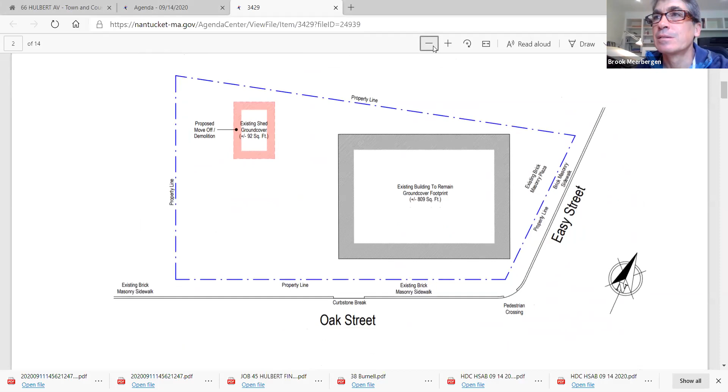So first item is 26 Easy Street, Kevin Dale, move off demo shed. You all know where this property is. There's two applications, one for this structure and one for this one on the corner of Oak and Easy Street. NHL data indicates that this is from the 60s, 1965. So this is the first demo move off, that shed, and then that's the second.

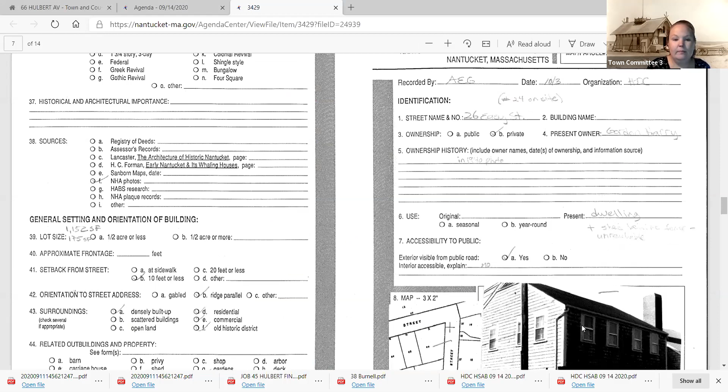I can get back down here. Don't believe... oh yeah, there is a HDC survey. This used to be Harry Gordon's property, just to give you a little bit of history to it. There are photographs that were included, they have not deciphered exactly when you look at these. Let me see if I can get to them. Might not be in this application. No, it's in the other one.

But there's historic photographs of the other structure. I think the main structure is older, but anyway, that's a different story. What's before you right now is just the shed. Which, Mickey, do you have any thoughts indicated on this shed? Who are you asking, Mickey Rowland? Oh, Mickey. Unmute, you got to unmute.

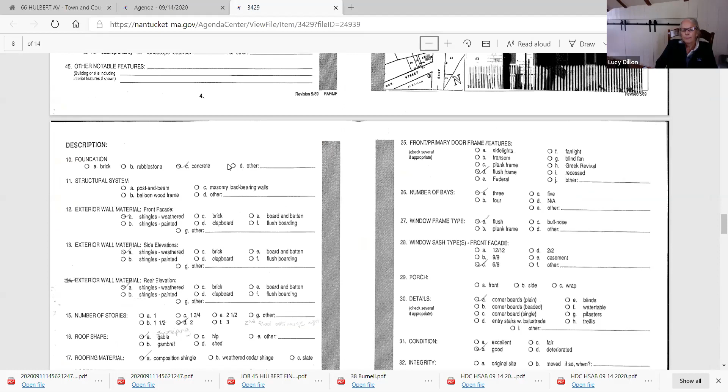Okay, sorry, looks like it's a concrete block shed. I think I'm fine with demo on that shed. Lucy? I'm fine. Okay. Angus? I concur. All right, no concerns from the chair.

Okay, get to the other one. This next one is demo move off mixed use structure. So this is the main building next door. Sorry, as it loads.

And what do we know about this? Well, I think it's older, just been changed over the years, the facade. But if you look at some of the historic photographs that they included in the application, and I've actually been looking at a lot of historic pictures from Easy Street Basin area recently.

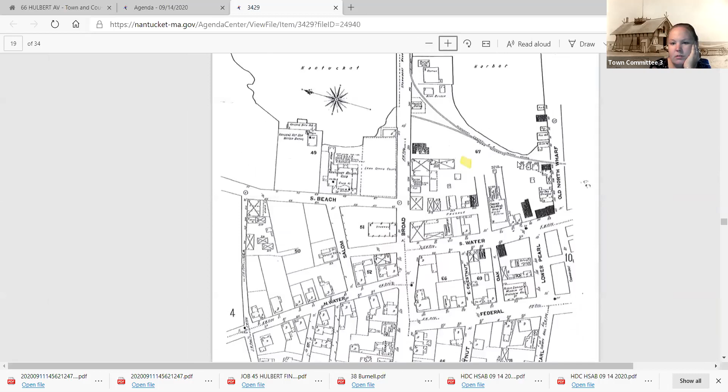Here. We all know. We've lost you again, Holly. That better? I do know they had to go to the ZBA for a lot of relief on this building when they converted the use.

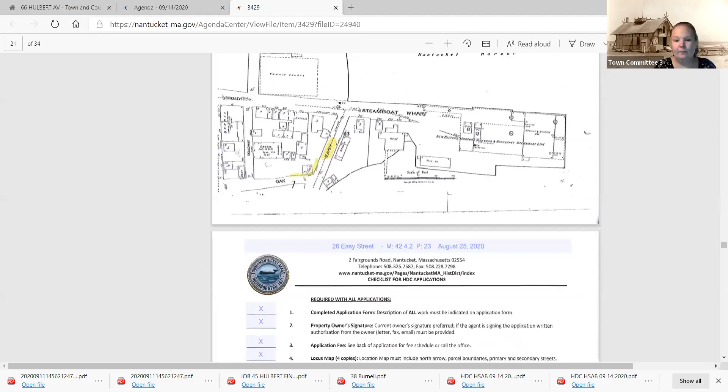So that is it. Looks like something showed up there in 1923. Yes, that's what I was about to say. On the '23 map, it looks like it first appears. That could also be the 1949 one because some of those are stamped 1923, true, but it's 1949.

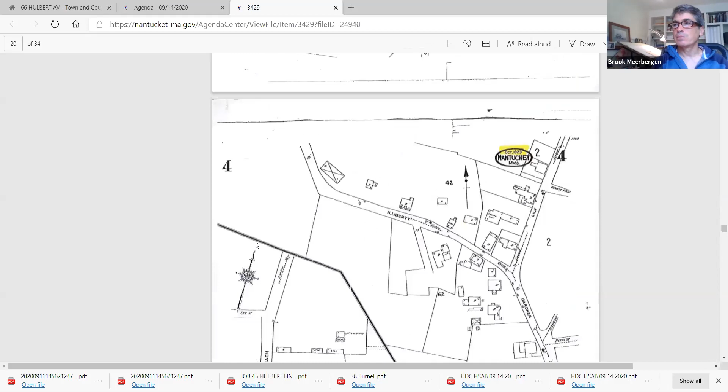Anybody notice any cinder blocks or anything on this thing? I'd like to see a better assessment of the building. Me too. I don't think we can make much of a discussion unless we know the date of this building.

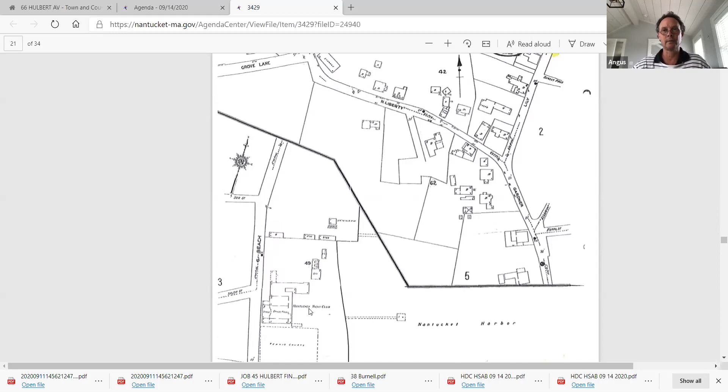Maybe just some sort of forensic work inside to look at the framing or the structure. With those garage doors, I would wonder how much interior was there if it was just like an open barn. From the front, it looks like it could be a house, but then with the garage doors, you wonder if the whole thing was just a shell inside.

As the building is now, there's nothing about it that says historic or valuable or any of it. And I really wonder what's really there. It would be great to have an as-built of it and maybe photos inside, to really judge what we're looking at, because it's hard to tell from the outside.

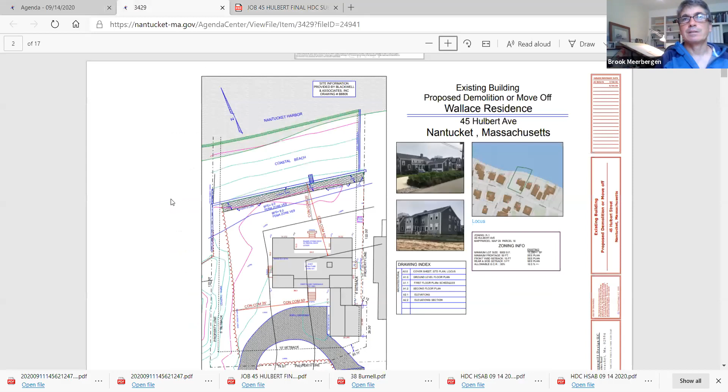We've done quite a bit, with Linda's help, we've done a lot of research on this project on behalf of the history and whatnot. What I'd like to do is break it down into three parts. I'd like to read our submitted general thoughts to give you an overall frame for what we're presenting, then look at the specific building, and then look at the precedents and context and the greater history for Hulbert.

So if it pleases you all, I'd like to just go ahead and read the general statement, unless you've all read it and you're all 100% zoomed in on it. I'll go ahead and read it. I've read it, but I've... Lucy, read it too. I've read it. Mickey, you've read it? Okay, everyone, so would it serve you better for me not to read it?

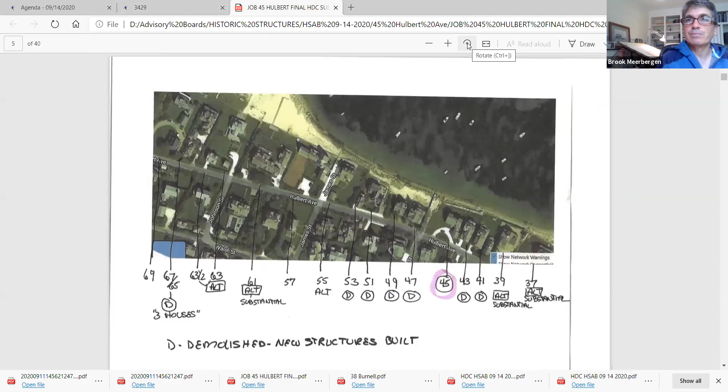I think we're okay to talk about it. If you want to just outline some of the basics, your basic arguments, certainly, why don't you do that? I'm just going to go ahead and read the whole thing.

For the applicant, on behalf of the applicant, we wish to demolish or remove off-site the existing dwelling with the attached garage. Once the structure is removed, a new dwelling approved by the HDC would be constructed no closer to the water than the existing structure. The Conservation Commission has approved the project as presented after consideration of the new design and proposed siting and the footprint of the structure. Maintaining the view corridor to the west was critical, which also resulted in compressing the house east to west.

It should be noted that we're holding pretty precisely to the existing footprint for Concom reasoning. A previous dwelling was located on the site. It was moved in 1938 to 25 Willard Street. It was of a dissimilar architectural design. The current structure was built in 1938 or 1939.

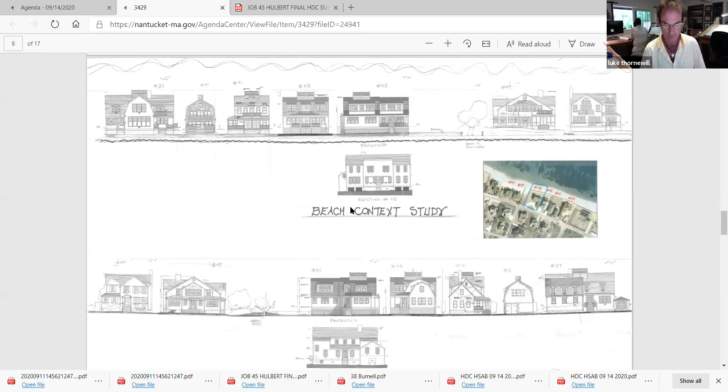Unlike the structures that are to the east down Hulbert, this lot is situated within a section of the street that has had substantial changes. 45 Hulbert Avenue is in the middle of 8 lots that have all had original structures demolished or substantially altered or were vacant, and new dwellings and ancillary structures built since 1985. Our review of the material submitted clearly indicates that the structure on 45 Hulbert is an anomaly.

Hulbert Avenue has an eclectic mix of gambrel and shingle styles with some more modern styles. There are a few box types like the existing structure, and the existing structure does not meet the guideline of building with Nantucket in mind, so we believe. There is nothing unique about the design compared to the others on the waterfront. It stands out as looming and with no variety in the facade.

Should the dwelling and the attached garage be brought before the HDC today, it likely would not be approved in our opinion. It does not have any discernible architectural style and thus is not architecturally significant, nor does it contribute to the neighborhood. Admittedly, it is over 50 years old, but that should not be the determining factor in requiring a structure to remain on site.

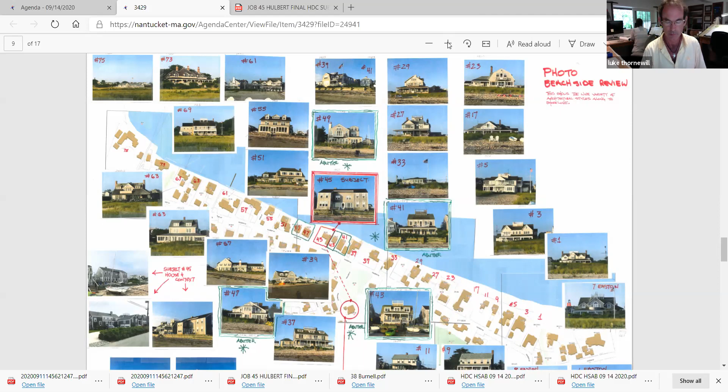There is little ability to work with the structure to improve it. Gambrel structures are more prevalent in the Brant Point area than elsewhere on the island. The new design would be in harmony with the neighborhood's context and typical of the architecture in Brant Point. It will be lower in height than several of the structures on the waterfront. The proposed design would have a less negative visual impact than the current structure, with the lower eaves that are currently in contrast to the vertical wall planes of the existing structure.

Proposed decks and fenestration on the water side in particular would be consistent with the other structures fronting on the harbor, as shown in the photographs. The configuration north to south is also consistent with a substantial number of structures on the waterfront. Data on the lots along Hulbert Avenue, photographs of those structures, aerials of the existing shoreline, and reports on several of the lots that have had demolition occur are included in the packet for your review.

We're looking forward to working with HDC on arriving at the best design for a new dwelling for 45 Hulbert Avenue, that would be an asset for the neighborhood.

I would just note that the island survey that accompanies this identified it as a contributing structure and called it out as shingle style, which I believe was in error, because based on my understanding of shingle style, and studying shingle style in college, this has no resemblance to shingle style architecture or any of the redeeming attributes to shingle style architecture.

Shingle style architecture, primarily in the late 1800s, had low roofs. They had tower elements, gang windows, bay windows. They often had a horizontality to them, second floor open decks. I think this has not been accurately presented on that survey as shingle style. I just don't understand how it could possibly be contributing as a shingle style building. So I'll just ask you to keep that in consideration.

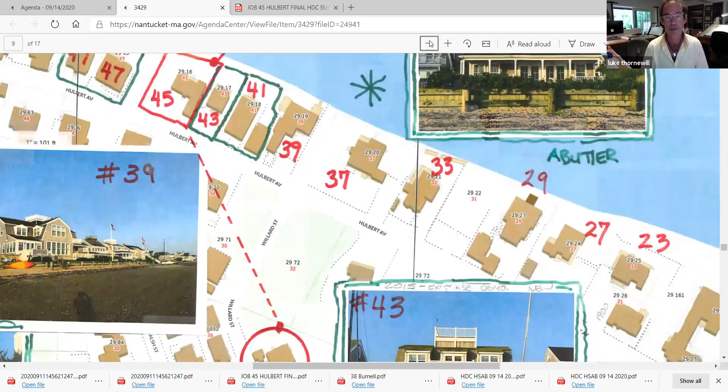And with that, I would hand it over for our context of what's happened on Hulbert, and maybe some more comments from Linda, who's done a really great job researching the history of the street and this property in general.

Hey guys, if you got it, you got it. So you were able to sort of get a grip on what we put in. After I did that map, there was one or two more that had been demolished and replaced, but you can see that we're in a section of Hulbert Avenue, unlike the section to the east of 37, down to 1 on Hulbert Avenue.

Down in that direction, you're familiar with the Craig property and a few of the other ones. A lot of those houses are still there, some with minimal alterations, but even the Craig house was one structure and it was separated into two structures on two separate lots. So even that has been changed. And some of the ones that are still there have been altered substantially.

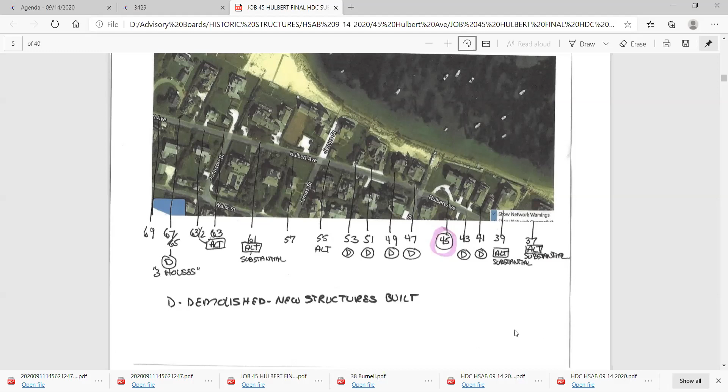If you looked at the pictures of Johnson & Johnson's house down at 73, I believe, that was a much smaller house, a beautiful house. And then they engulfed it with all kinds of decks and additions and everything else, and they moved that 50 feet farther forward.

Even Hammy Hurd's house to the right of our house there, with the new shingles on the roof, that was significantly damaged in the 1991 flood, and that was altered quite a great deal. The large one to the right has been minimally altered, of Hammy Hurd's house down to the right of the picture. So there's been a lot of change in this neighborhood, including across the street where there was nothing, and they all started to get built and houses were moved around over there. The gambrel style, as Luke said, is quite common down here.

And it's very eclectic. The one at 47 to the left in that picture is a very interesting looking house from the water and the road. It doesn't look like anybody else. You'll see dormers and additions, and not all of them have attached garages.

In fact, most of the ancillary structures are separated and actually front on Hulbert Avenue. But we're in a pod of about 7 to 8 structures with a little gap to the left, and then 3 more were demolished, and that were all gone. People have sort of assumed that everything down there dates from the 1890s or 1920s, and they don't.

Our original structure moved over to 25 Willard, and there are pictures in your packet of that, which is a totally dissimilar type of structure. But you can see from this picture how boxy it is, with no discerning architectural style. It looks like 2 really tiny houses that were stuck together with an intermediate structure of some sort. We'd like to just make something that's maybe even as eclectic as the rest of them down there, or something that fits into the neighborhood more.

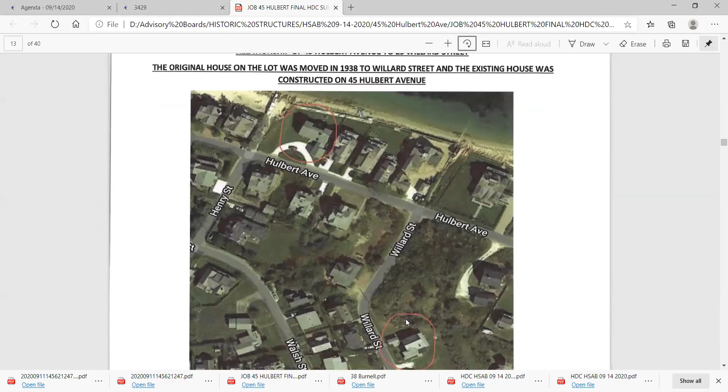So it's a changing neighborhood. It still maintains its sort of eclectic oceanfront estate kind of attitude, but this house really doesn't do it. See the other house down there? That's where that house went.

What's interesting about trying to date the houses down there — unless you look, because camera maps don't always do justice down there — is that when they can't figure out the date of a house, the GIS in the town records automatically puts 1900 on it, even though some of these houses, like Johnson & Johnson's house, clearly predate 1900, because there are pictures of it from 1880. When they don't know how old these houses are, they just throw 1900 on it and move on.

So it takes a lot of research — all these surveys, the aerials, the deeds, the old land court plans — to come up with a history of every single house all the way down Hulbert. I've had to do the same thing on Easton. I don't ever want to go to Brant Point again. But here you go, that's a good picture of what it looks like. So if anybody has any questions, I'm here.

All right, who would like to go first? Mickey? Okay.

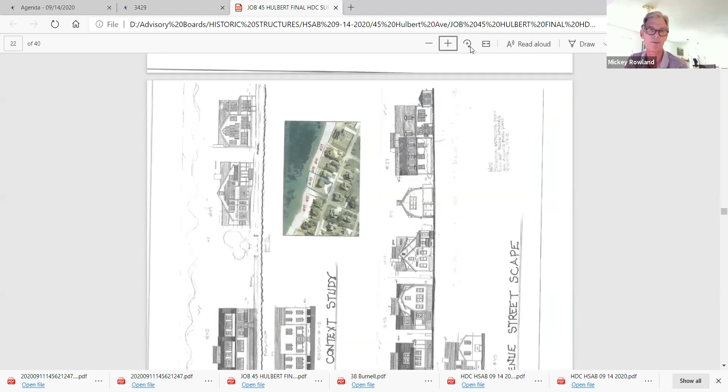This is an 82-year-old building. To be honest, so far I haven't heard any real strong arguments why this should be demoed. You're saying that it's not very attractive and that it's not shingle style, and I'm not sure those are relevant comments to whether we should be demoing a building or not. It doesn't appear to be structurally a problem, and I just don't feel that the HDC should be sanctioning demolishing 82-year-old buildings. 1938 is a very relevant period.

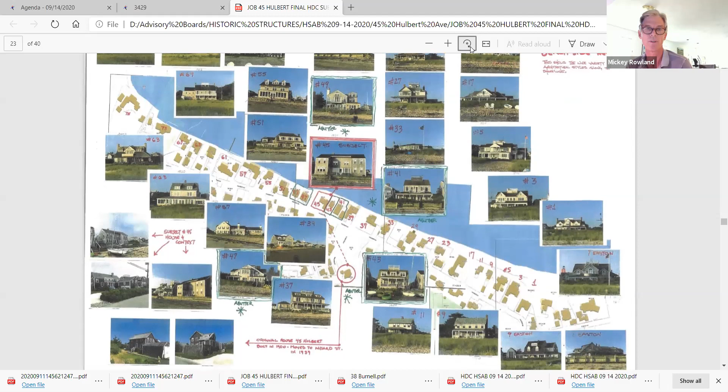I'm pretty uncomfortable with the demolition on this building. I think if they wanted to work with it, which I think is the right thing to do, is to keep the building and modify it. It's not my job, but I'm just saying, I think that it could be...

I think before you just come in with a full demo and a brand new building, it needs to be reviewed in terms of what can be done, how it can be modified, upgraded. I wouldn't mind seeing some changes to it, but the full demo — I just haven't heard any good arguments why it should be demoed.

Can I speak to that to some extent? Yes, yes. So basically, one of the things we presented to the Conservation Commission — and I'm sure, Mickey, you understand what happens to buildings — when you work on a building and an owner wants to significantly change its interiors.

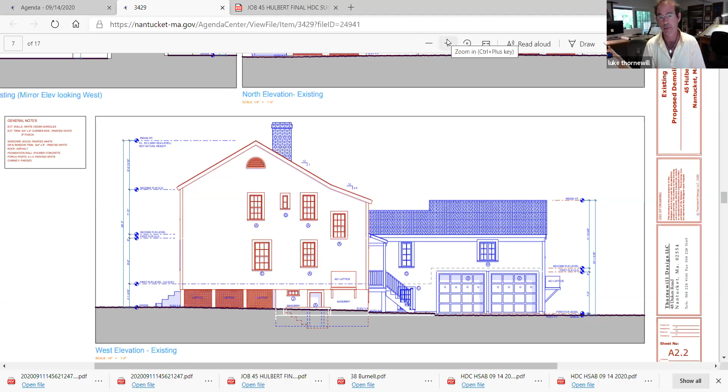But based on the client's interior program and hopes to bring everything up to modern standards, as everyone likes to do, in terms of anticipating the next 100 years, they're bringing the entire structure up to a higher level of structural integrity to meet current codes, changing door and window openings. If you look at the door and window openings of this building, it seems impractical to think a homeowner would want to stick with it the way it is.

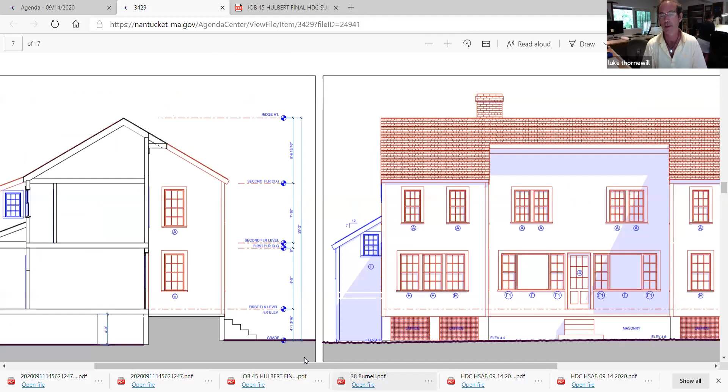But to your first point, it's the owner's choice, basically in terms of programming and how we lay out the interiors, to determine whether or not the interiors are going to work for them. And in this case, the owners have said it wouldn't.

Structurally, again, it's going to come up in the air another foot and a half. Yeah, we could scissor everything up. We could, by the existing—you all know what happens as people change door and window openings, the original fabric just starts disappearing.

So I suppose, to your point, I'll just end by saying that's sort of where we are on those thoughts, Mickey. Mickey, can I have one more comment about that?

Yes. Town counsel—because none of you are on the HDC—when we would have these organizational meetings that would go on and on, town counsel some years ago came down and said you cannot hold a structure based solely on 50 years. He said it has to be architecturally significant or contributing architecturally, not because of the age, and not because it's over 50 years old and gets that contributing moniker put on it. He was very clear about that.

What we don't have to do is we can always ask to demolish or move, but you have to provide a reason to deny that, and it cannot be just based on 50 years. It has to be based on its architectural significance to a particular setting. We're taking the position that it is not architecturally significant to this particular setting, and we don't have to provide an argument as to why we want to get rid of it—but we want to get rid of it, to be blunt. But what would be the reason to maintain it? Is it architecturally significant? It cannot be based solely on the fact that it's 50 years or more.

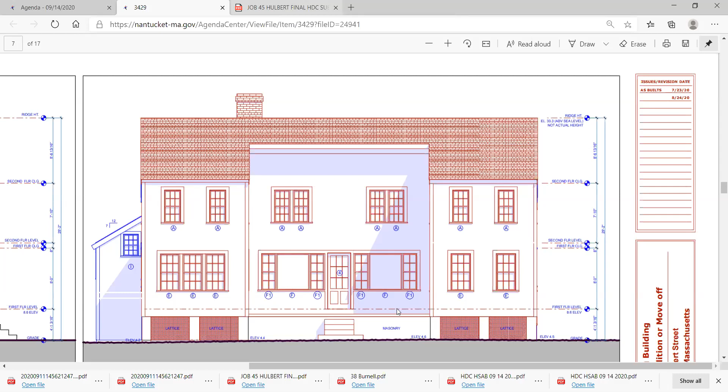Can I have one quick comment on this? Sure, Linda. I have to go back to the fact that 4 houses to the west, 2 houses to the east, and then you could jump a couple and more than that, all of those older structures, some predating this one, were allowed to be demolished. None of them moved, they were demolished. And that was all since 1985. We're not talking a long, long time ago, not the 40s and 50s where things happened. We're talking that those structures to the east and west of this one, and more to the west and more to the east beyond the immediate abutters, all were allowed to be demolished after 1985.

And the HDC was in existence in 1985. They were in existence in the 1970s. They were in existence back to the middle of the 50s. And a lot of this change has occurred since 1985. So again, we don't have to tell you why we want to change it, that's not required under the Act. We're asking to change it, to get rid of it, and to put something that we feel is more architecturally appropriate for the neighborhood. We're making the case that there is nothing architecturally significant about this structure, particularly given the precedent east and west of this structure, and we're sticking to it.

All right, Linda, are you done? Yeah. All right, Lucy, would you like to say something? Yes, I would.

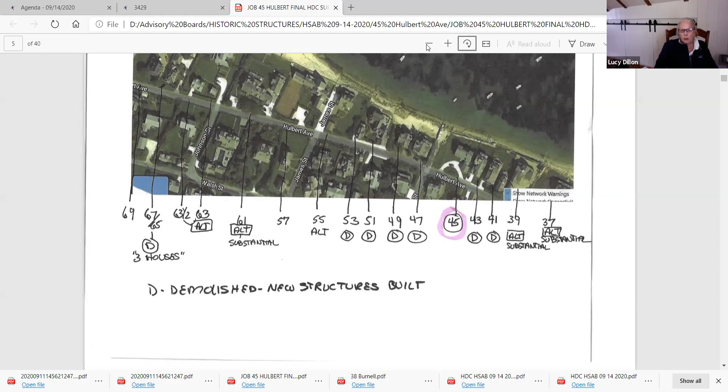Just because there've been a lot of changes in the neighborhood makes me feel that it's more of a reason that this structure should stay. And the town counsel, he's a lawyer, he's not an architect, and architecturally significant, yeah, this might be significant in not great design of the era. Also, to lift it, to put in a new foundation, the height would be increased. But looking at the plans for the new structure, I believe that would be about in the same height range.

And I agree with Angus. You know, if you decide to live in an old house, you live in an old house. If you want a new house, go to Cisco or somewhere else. I just think that maybe this isn't a beautiful building by our standards, certainly, but it's an example of old-timey Hulbert Avenue. And I just hate to see another building with just gobs of white trim, just massive stuff. Well, that's it.

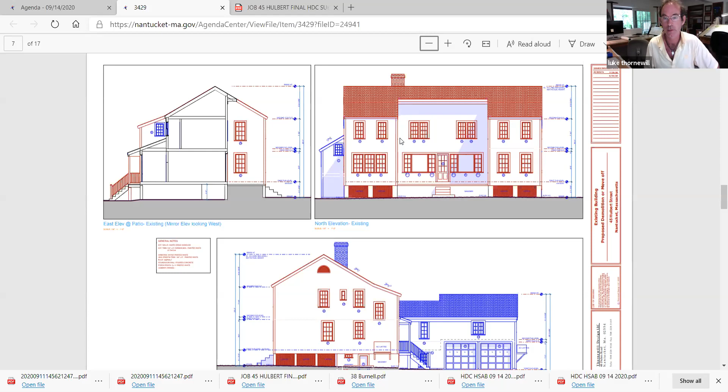All right, I'll tell you what. Luke, you know, I've worked on 86 Main Street, I've worked on 84 Main Street. I'm really quite tuned into what preservation values are. And I've been studying architecture since I was 18. I've been on this island for 30 years. My personal opinion is this: what you guys are doing here is you're basing it only on age. There's nothing architecturally significant about this, with the exception of a sentimental background.

Okay, let's not go down that path. Let's, I think we've all spoken our piece. We're an advisory board. And I think that we've made our case and our opinions known, and I think we can move on unless there are any objections. Brook, I didn't hear what your opinion about this was. Do you agree with the consensus?

Honestly, it's tough because, yeah, it's definitely not attractive. But it also, like, again, I'm going to play the sentimental card here, because I spent a lot of time at this house as a kid. There's just a lot going on in this building. There's more there than meets the eye with this structure, so it's hard for me to look at it as anything other than that. That's why I've been kind of reluctant to express my feelings about it. But that's it, thanks.

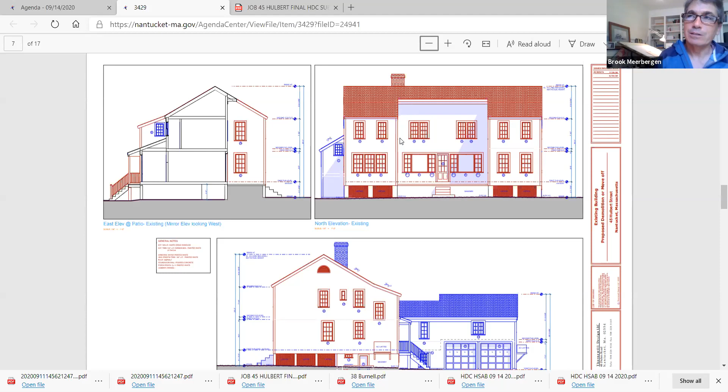All right, I think we can move on to the next application. Well, there's a replacement house. Did you want to discuss that? Let's see, would you all like to take a look at it?

I only have one comment. Lucy, go ahead. Well, it's not architectural, but I did notice that the driveway is made a lot smaller than it was before. But you've got all these bedrooms. And my only concern is that there's a public access right there to the beach, which I myself use in the winter regularly, and that street parking to utilize that beach access is going to be diminished.

All right, Lucy, what are you speaking to? The new building for Hulbert Avenue. Okay, so we do want to open this then. Is that, oh okay, yeah, you just opened it. Okay, all right. Well, I Mickey, can take that back if you don't want to. No, that's all right, Mickey, would you like to speak to this?

Well, I guess I might ask Holly if the HDC has to review this demolition application. It's loading slowly. And if it's denied, and who knows if it will or not, that's not up to us. I'm just wondering if we're maybe wasting our time right now talking about the new building. I mean, I'm happy to do it, but I'm just wondering if there's time in the process that once the demo has been approved, then we can come back and look at this building.

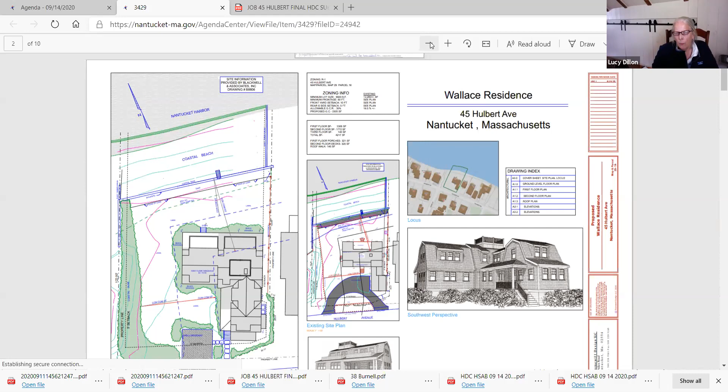Well, we'd like some guidance, chair, to the right answer now. Hang on, Linda, would you like to say something? Well, we just like some guidance on this right now, so we don't have to do everything at one time, but we'd like your opinions on the design. If there's something glaring, then we can change it. I have a question: if the HDC approves a demo, are they going to go right on to the new building and then we won't have a chance? Yes, that's why I want you to sort of weigh in now if there's something really egregious going on here that you have a comment on. Yeah, and I think, Mr. Chair, to that point, it would be my recommendation to give comments on this application because we don't know which way the HDC is going to go.

Okay, I'm in agreement. All right, Angus, would you like to speak to this building? The design only? I can. I don't think it's a bad looking building, and I would say that...

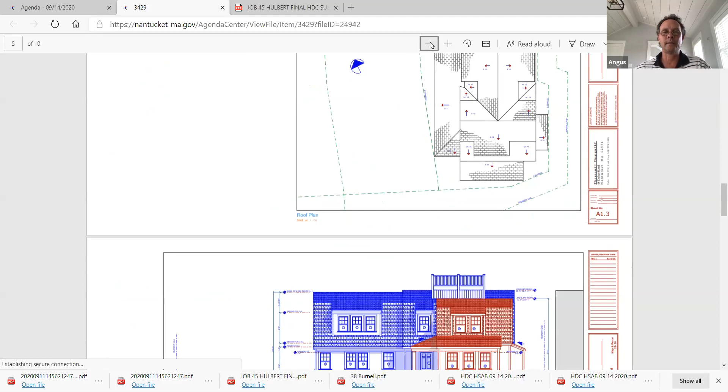It's starting off higher as it would need to meet current codes. I would pay closer attention to the examples that are actually cited on this application — there was an HDC approval that was used as an example. I don't know if you can pull that up, Holly, but it shows a waterside view of a gambrel with dormers. This feels monolithic on the north face as proposed, whereas in that example there's depth, there's push, there's pull, it's broken up so that there's a projection out on a lower part and then pushing back on an upper part, and there's a little more variety. I think you want to do the same thing with this new proposal. The dormers are smaller, they still have three balconies on this, but it's not all in the same plane.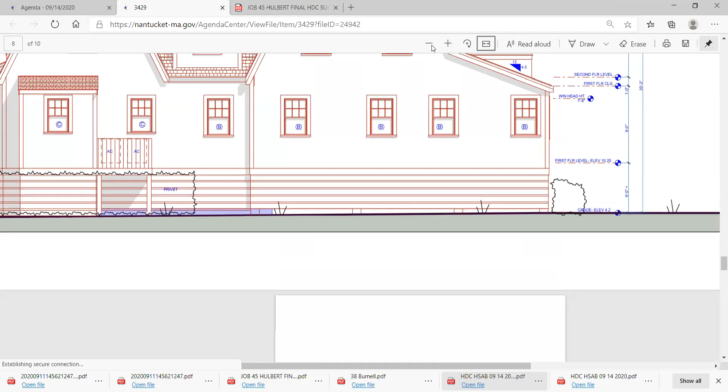And I think it's much more successful than what's proposed. So I would go with smaller dormers and break them up. I would do a little bit more push and pull with the rear facade, waterside. Just to point out, that is a consistent ridge where they have varieties — that right-hand sunroom pulled out, that used to be part of the porch. Thank you, Linda. Linda, hang on — Holly, you had said you wanted to speak, to weigh in.

Yes, Mr. Chair, and that's actually perfect, Angus, because I was going to say the same thing. With this example, with respect to the gambrel, I wouldn't disagree that a gambrel is very consistent with the way Brant Point has been going. And there's precedent provided with this photograph, obviously.

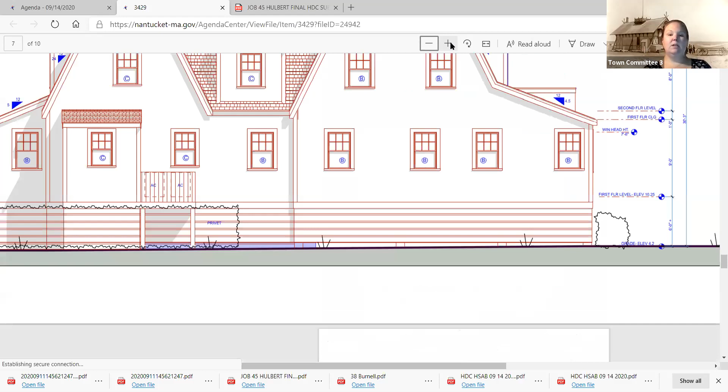But the new design, I understand from Concom they have to keep the same footprint, but the new design in this L-shape scenario is not set in precedent like this gambrel is. As we all know, each HDC board can be different from one aspect to the other, from one approval to the other. And I get the intention to retain the same type of footprint, but this first view of it...

It seems massive with having that front protrusion, instead of having one longer, or maybe even make it a little bit more unique instead of keeping it. It's just something about having it stick out towards Hulbert that is not jiving with my intentions. But anyway, it's pretty much where the L is for that attached garage on the current one, which isn't attractive either.

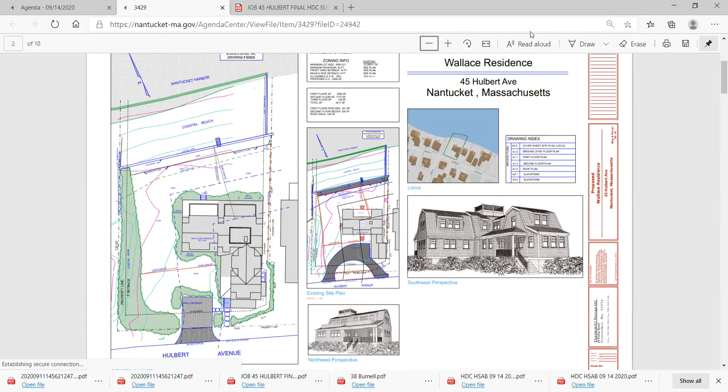All right, so Mr. Rowland, would you like to speak?

Yeah, I mean, I definitely agree with Angus's concern about the north elevation on the water side. I think it's too consistently, you know, the ridge is essentially one long ridge. The other floors are broken up right down the middle. It's sort of like two pieces, two buildings stuck together.

What I liked about the other example that was presented is that it had more of a central feeling, a central focus to the building rather than just long windows and porches and dormers and decks. The roof walk was off to the side. It doesn't even really feel like a main mass where the roof walk is from that side. It could be more of a central focus rather than just a broad structure.

On the front side facing Hulbert Avenue, that perspective view shows this pretty well. Holly, can you go back to that?

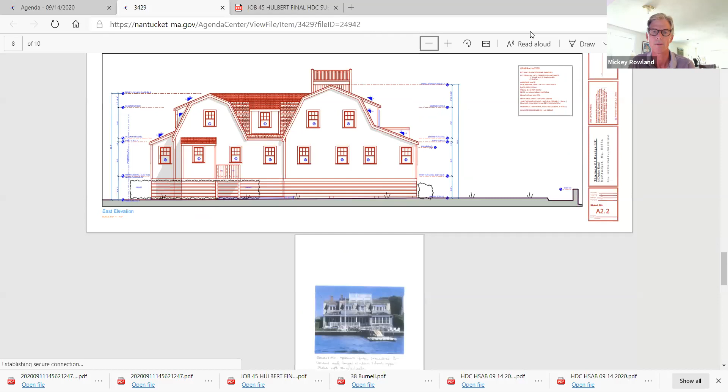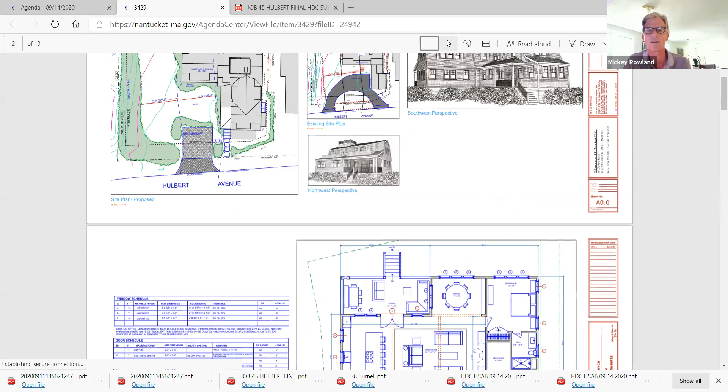It's up, go up, this one? Perspective, first front page, right there. Up, yeah, just up a little bit. That's the street side, go right there. No, yes, right there, now go up to the perspective that shows this side view. The footprint or the side? Keep going up, I think it's near the front main sheet. Ah, sorry. Here we go, zoom in on that, yeah. So look at... it's to the right. Holly, move it over to the right. Getting there, it's slow, yeah.

So the front door, that's the front door right there. I see it. So the front door should be a real focus. It should be the main event on the front of this building. It should be in the main mass with a real central focus and importance to it. This to me feels like it's not in the main mass, it's on the projection. It just feels like an afterthought, and it should have more relevance. I don't mind the projection toward the street, but I'm not sure the front door belongs there. The front door should address Hulbert Avenue a little bit more formally.

And these pieces fit together, but it doesn't give a real central, even additive mass to it. It has just sort of a jumble of gambrels stuck together. I wish it had more importance to the main structure with some subordinate side pieces, especially the ones coming toward Hulbert Avenue.

Mickey, are you familiar with Hammy Hurd's building, which is like four buildings to the east? It's a gambrel of almost exactly this kind of additive mass with gambrels. If you get down to Hulbert Avenue, take a ride over and take a real close look at Hammy Hurd's building. This is very reminiscent of what Hammy's looks like. Obviously he doesn't own it anymore, but that's basically the same thing.

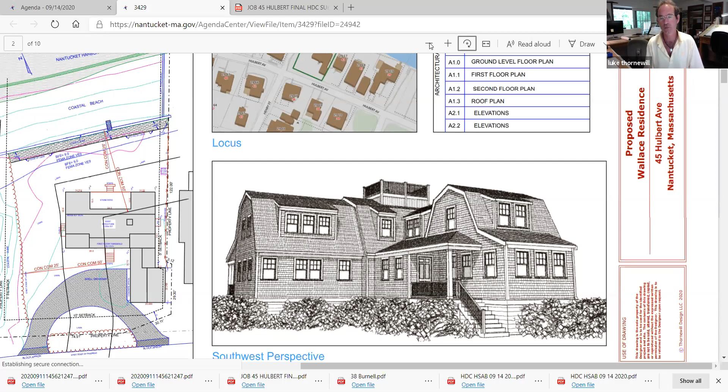And so this example, I understand from a sort of a purity standpoint your position, but my thought would be that sure, we could take that front door and push it all the way back to the main mass. Who's to say, though, from an additive massing standpoint, since everything we're doing is suggesting that over time certain things happen.

This presentation is the concept of a porch that may have had a front door on the main mass at one point, which got filled in, and the door shifted out. This is how additive massing often happens on some of our favorite buildings over time. Originally, the concept is that the Widow's Walk was on the original primary mass, and then it grew from there.

Our limitations in footprint were such that we had no wiggle room. The limitation is that this building is only 25 feet tall or even less if you take it above the floodplain. One of the disadvantages of bringing a new building into a floodplain environment is you have to counter the added 6 feet of height that we're basically coming up to at the front door.

If this building was on the ground on its own, sitting 6 feet lower, it would be of significantly lesser impact in terms of it all seeming so big. But it goes back to the point that we're stuck in this environment of having all new buildings and old buildings getting lifted up, and we're stuck with this, in our case, close to 6 feet above the ground level.

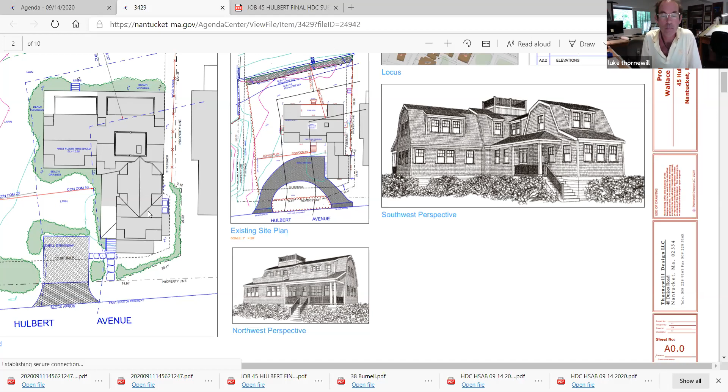I could do that. I think the long and short of it is that we would want to see revisions back afterwards, and I think there's consensus here that we don't really see... even if there's a long history of historic buildings being removed from this neighborhood, hopefully this won't be another one. But if this design is what is brought forward, we need to see it back. Okay, I agree with that.

Thank you, Luke. All right. And Mr. Chair, can I—yeah, just make, I know we got a lot on the agenda, but I just want to make a point to this whole discussion about FEMA.

Trust me, as the local hazard mitigation plan coordinator for the town, I understand. However, that's the whole reason why we're working on creating design guidelines specifically to be sensitive to our historic integrity. There are exemptions for historic structures for elevation purposes to accommodate flooding, so that's what we're working on, so people don't think they have to completely get rid of, say, a pristine basement just to accommodate flood proofing, wet proofing, what have you. I just wanted to throw that out there—just because they say you have to do this, our design guidelines are going to be more flexible with our National Historic Landmark. So stay tuned. Hopefully we'll be able to make it a little more accommodating for everybody for our historic and built environment, so people don't think they have to completely tear down existing and build new.

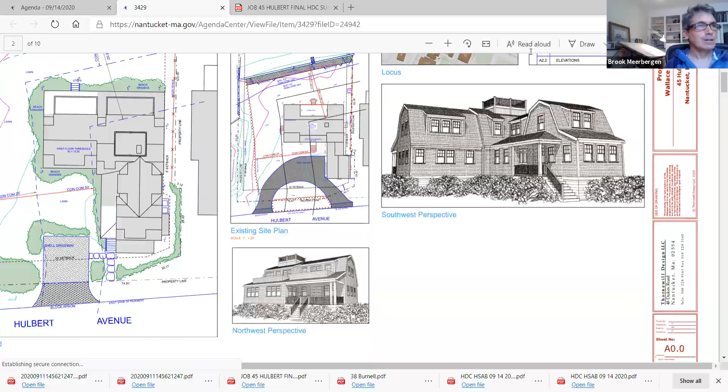Okay, thanks. All right, so my feelings are that a building in this area—I think there's an opportunity to do a little bit more here, design-wise. This is generally appropriate. I don't mind the gambrel, but I feel like if you're going to knock down a building, put something there that speaks a little bit more to the shingle style history of the area.

So that's one big theme. The other theme—going back to touch briefly on the demo—you have a building which I believe the footprint is actually larger than what's existing. Why not knock the top off of that other building and build what you want on top of that old set of walls? Or at least maybe reconsider using some of those existing walls. You can change the form even, but I feel like you could take advantage of the situation there and do the right thing at the same time. So those are just my two thoughts on this.

And otherwise, I'm ready to close things out. Ask you a question. Yes, go ahead.

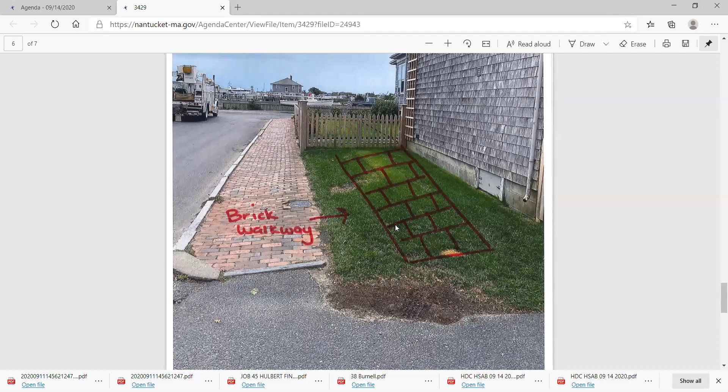I'm working for these guys on a realm of issues. I believe Luke is going to be coming back in with an addition. This young family just bought it, and I believe they wanted to run the walkway towards the back into, what is that, Mackey Way? Yeah, everything is back there.

Is this going to be a driveway? No, it's only 3 feet wide and about 15 feet long from the gated yard to the back. I believe that the garage comes in from the back side.

All right, Lucy, would you like to start? Yeah, I watched last winter as Nantucket Fence did all the fencing and everything else, and wondered why they didn't continue the fence down there. I don't get this.

That's a double gate there, I believe. I just don't understand it. Either you come out of the gate and hang a right out to the sidewalk, or you walk on the grass, or you extend the fence all the way down to the corner. It looks weird, like it's going to be parking. It's 3 feet wide, it's like a double sidewalk. So I say no.

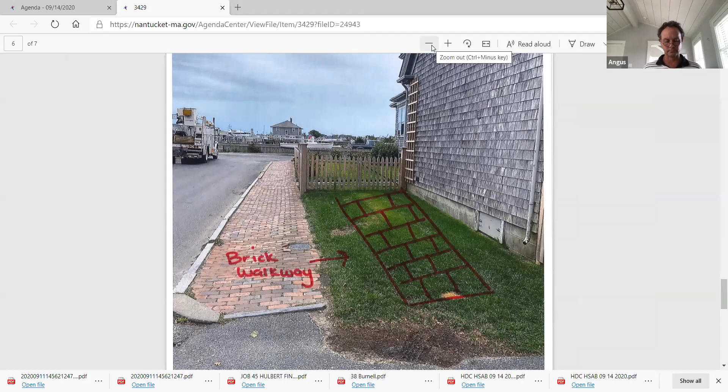Mickey? Sorry, okay, I agree with what they were saying. It doesn't make much sense to me. It seems very redundant to have this next to the sidewalk. Why is it even needed? Maybe if they have a better explanation for it, I might consider it, but I doubt it. It just seems like too much brick for no reason. Why is it there?

I certainly agree, I'll find out. I didn't put this one in, so I was sort of surprised to see it on here so soon. Looks like a lot of brick for no reason. Okay, I'll find out what the reason is.

All right, thank you. I'd like to close this and move to the next. Any objections? No. All right, thanks, guys, thank you, Linda.

So 17 Lincoln Ave, move building and modify.

Can I make a comment? Sure. Every single application that we've had so far, there's been no building date filled in. Yep, I know. And there's no excuse, these people know better. I wish I had a good answer for you there, but I don't. I'm just as frustrated as you, trust me. I mean, technically, it's incomplete.

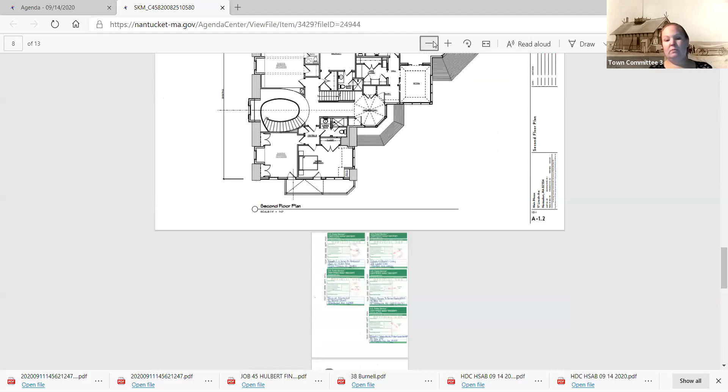This is a new building. This is new? Okay. So I don't know when that one was demolished. How new is that style? It's pretty new. Wow. Okay, I'd say 90s. Okay, well then that's consistent with what they were saying. Okay. All right, I guess they're moving.

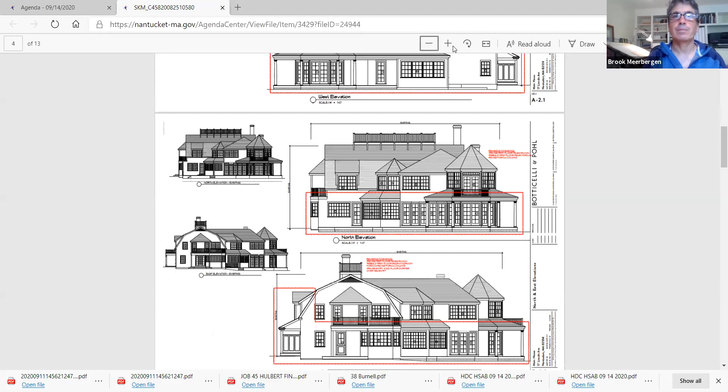Angus, would you like to speak to this first? Are you ready? Thank you, I'll wait. You'll hold? I'll hold. Mickey, would you like to speak?

Sure. I don't think the move in that location is a big deal. I don't think it's going to be very noticeable. In terms of the window changes, they're adding some shutters, sort of a front porch, getting rid of that balustrade along the front. I almost like it better. They're getting rid of some transom windows over windows in the back. I think it's an improvement.

Haven't seen anything that I object to. Lucy, would you like to say something? Yeah, I'll go with Mickey. All right, Angus?

If you look at the Locus Plan and look at all the houses around the circle, they generally are set pretty far off the road. So it gets my attention that it's getting even closer to the road. That seems atypical up there. Honestly, I like the charm of some of the icing that is on this cake before the proposals. I think instead of just another house that looks like another house, there are some elements that make it stand out, including the balustrade and the fan light and so forth. So I actually prefer it the way it was. None of it's glaring to me, but I kind of prefer where it is and what it is.

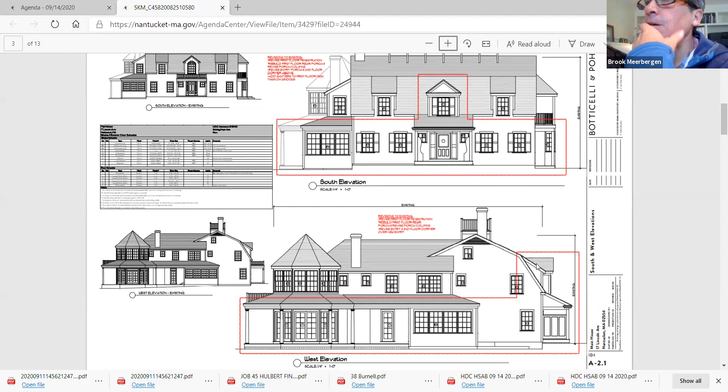All right, so I would lean towards Mr. McLeod on this one. I kind of like the smaller lights on the window panes on the original design. It feels more like a shingle style structure. Overall, is this a big deal? Maybe not. I think having a building that massive move closer to the street might be a little bit of a visual encumbrance when you're up there. But I could equivocate either way, but I definitely lean towards Mr. McLeod. I think bringing up the point of the other houses in the neighborhood, which I wasn't focusing on, is a good point. So I think the move is a little detrimental. I'll go back in that direction.

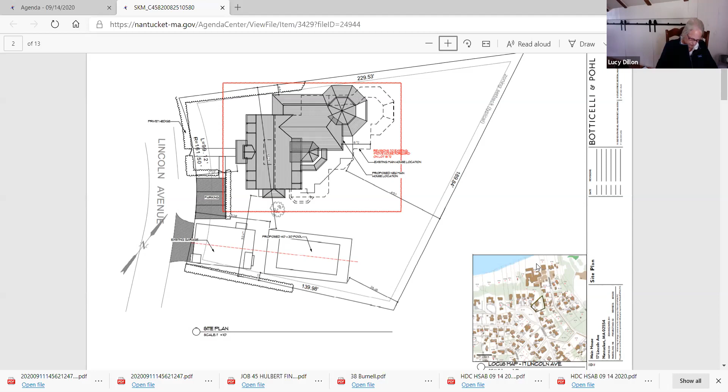Okay, all right, Lucy, have you spoken? I forgot. No, oh, I'm sorry, fine with what everybody else said. Okay, thank you. All right, if there are no more comments, I'd like to close this and move on.

All right, let's move on to 17 Lincoln Avenue, pool with auto cover.

Mr. Chair, I'm happy to start. Mr. McLeod, would you please take it away? Due to lack of visibility, I don't have any issues with it.

Lucy? Are you required to have fencing with an automatic cover? I don't know the answer to that. I don't think so. I think if you have an auto cover, you don't need fencing. Is that right, Holly? I'm pretty sure you can just have the auto cover and no fencing. Well, maybe Holly could note on there that if there is to be any fencing, that it has to come up for approval. Thank you.

And Mickey, did you speak? I'm okay with it. I see it behind the garage, the hedge beside it. I don't think it's going to be very visible.

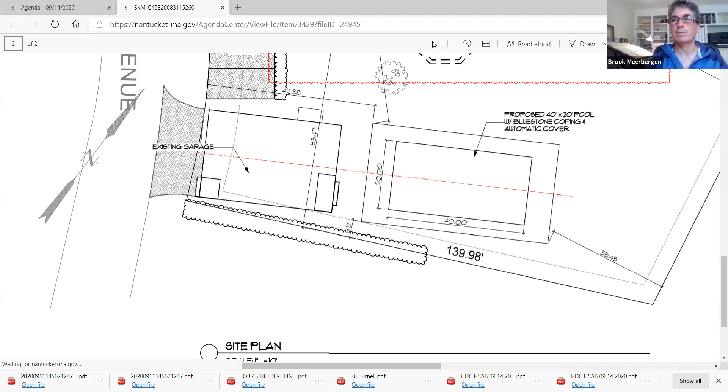All right. For the most part, I don't think this will be visible. I do think I would like to have some kind of visual break between the garage and the building. You can probably look down this parking area at some point, like maybe even during the winter time when that privet hedge has lost all its leaves or the deer have eaten it down to nubs, and you'll be able to look in and see the pool. I wouldn't mind seeing some kind of more permanent screen than a vegetation screen between the garage and the house. But otherwise I'm fine. I think that's a good suggestion.

Yeah, I'd also like to know where the AC units are for everything. Okay. All right, if there are no further comments, I'd like to close this and move on.

All right, next, application 10 Delaney Road, Lot C, new dwelling.

I'll just start talking while this is loading. So you all are familiar with Tony Yates's former property up there off of Delaney. That's what this is, and it's been turned into a 3-lot subdivision, ANR subdivision, with board approval. This is the last—sorry, this is the pool—this is the last lot at the end of this little new cul-de-sac called Reliance Way.

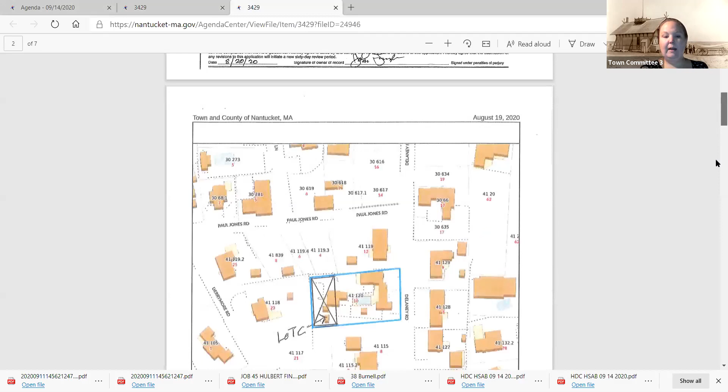Holly, I can't hear you. Hear me now? Yes, okay, sorry. It's frustrating, I'm hanging on every word, but it's like I'm getting every fifth word. Sorry, Angus.

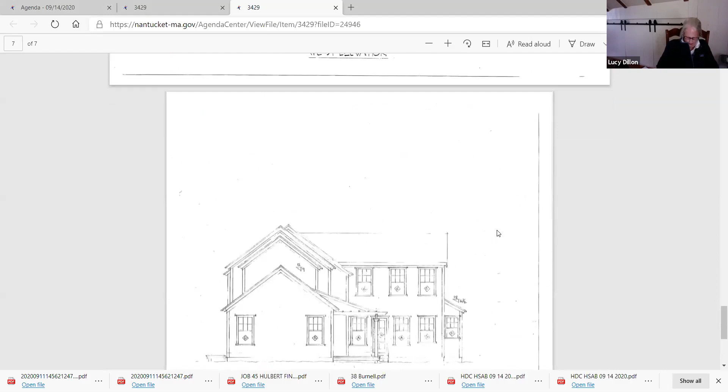Lucy, do you have any thoughts? Would you like to start? No, no, go ahead, someone else. All right, Angus? Can I wait? I need to look at this for a minute. All right. Mickey, you want to wait and look? No, I got a couple comments.

All right, so generally I don't mind this sort of massing, the massing and scale of this isn't so bad. The couple of concerns though, on the west elevation, there's an asymmetrical gable that bothers me.

Also, when you look at the front of the building, facing south, I'm generally okay with that. But when you look, you see that gable facing forward where the main mass is, and you look to the east, the proportions of that main mass feel a little backwards. It almost looks wider than it is deep. It seems like the gable's running the wrong way, or maybe the proportions are wrong. You see what I mean? Compare the south and the east.

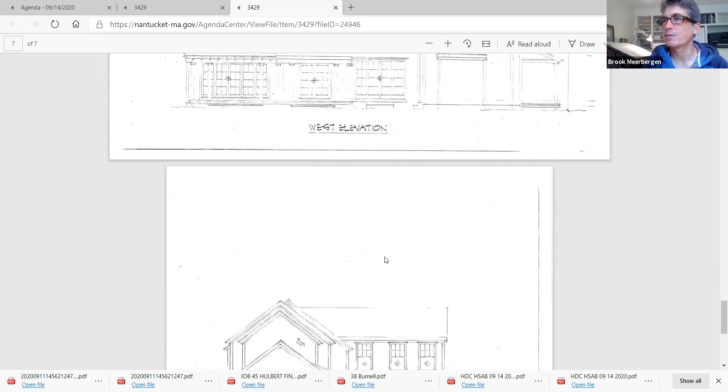Is that because of the eave lines being higher? Well, I don't know what the dimensions are, maybe they're here on the drawing. 24 wide and 20.5 deep. The ridge is running the short way rather than the long way. Yeah, yeah. I don't know, maybe that could be fixed.

I think another issue is there's a lot of telescoping going on. The west elevation has 4 sections to it. Maybe the first 2 could be combined, and that would sort of solve my issue. It just doesn't feel quite right because of those proportions.

Angus? I agree with those comments. It's a little bit confusing on these drawings. When you look at the north elevation, there's a drawing error, you see the 3 gables? And it's just a bit confusing because of the overlap of the gables.

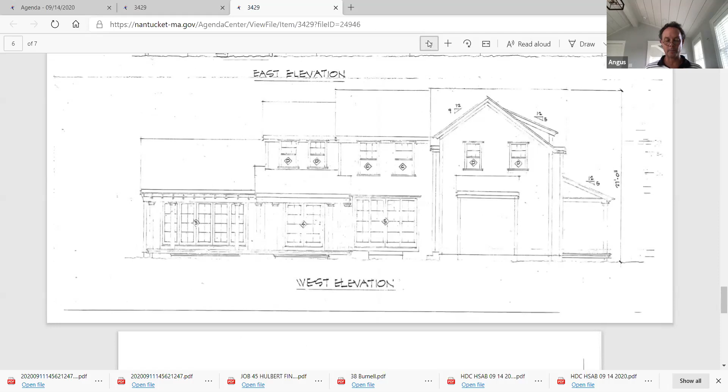It doesn't seem consistent when you look at the east and west elevations - the main gable looks like it's proud of the next one towards the center of the house in both drawings, which would make the gable proud of both. So in that view it would be showing the whole way through, but it's showing that it's cut off. I'm not sure the drawing is accurate.

But also I have the same concern about the west elevation and how the gable's uneven. And then there are those little walls that are like 1.5 stories tall, but only 1.5 feet wide. I would tend to agree that maybe the middle portion just joins the larger one. But it's like there are two that are very similar in height, but not quite exact. Yeah, I would make that second gable, adjacent to where the front door is on the east elevation, lower or higher, or do something. I'd like to see it back.

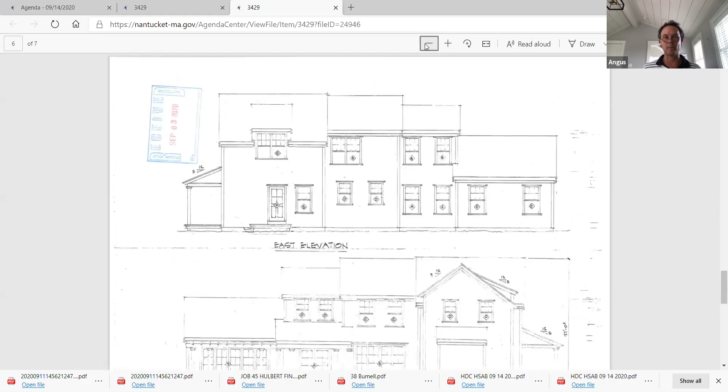Lucy, would you like to add anything? I find the design confusing, that's all I'll say. All right. I'd like to see it back. All right.

Chair agrees certainly with Lucy. I do feel it's a little bit confusing to the eye trying to figure out what's going what way. My eye wants to see on the east elevation that primary mass have a gable facing me and an eave line facing south with this particular design. Or if you're going to run a gable, absorb that secondary mass on the east elevation and add a dormer, or just something - it's a little bit chaotic in terms of its massing. Plus, the windows kind of go up and down a little bit too. Normally that stuff doesn't bother me, but in this instance it doesn't seem to have a rhyme or reason.

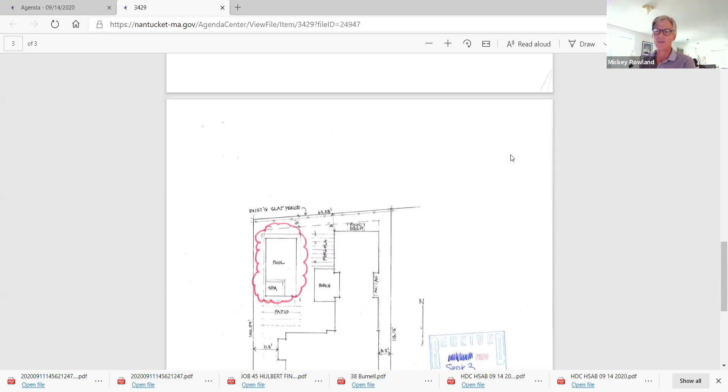Yeah, it's not on Google yet. This is the same property, the old Tony Yates property that was subdivided into 3 different lots off of Delaney. So this used to be 10 Delaney, and now it's Reliance Way, the last lot. I think it's fairly hidden deep in there.

Lucy? You got the pool equipment back there, or is that just gonna be plunked on the ground? Is it gonna be fenced in with the AC units? Oh okay, I see AC over there on the side now. But if there's no fencing, I don't think neighbors should have to look at your pool or AC units or pool equipment.

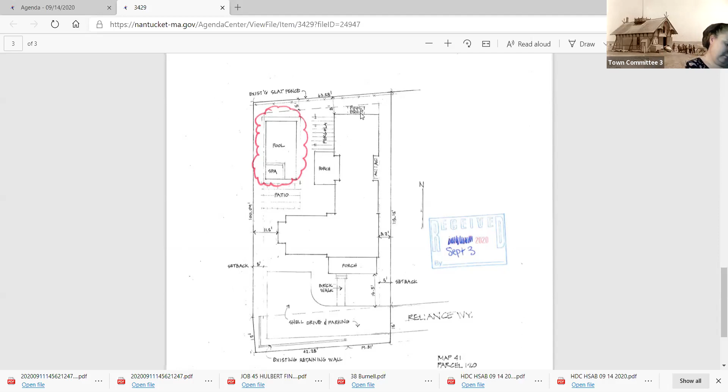There is a fence. Looks like the pool equipment's gonna be right here, so that should be fine. We don't know how tall that existing slat fence is though.

I think most of this is invisible, so regardless of our pet peeves, I think it meets the basic criteria that the HDC sets. Any further comments? No. All right, I'd like to close this.

19 Lincoln Ave, remove a roof walk. So this is not a historic structure, I got circa 1994. And although it's not a historic structure, in my opinion, I'd love to hear what everybody else thinks.

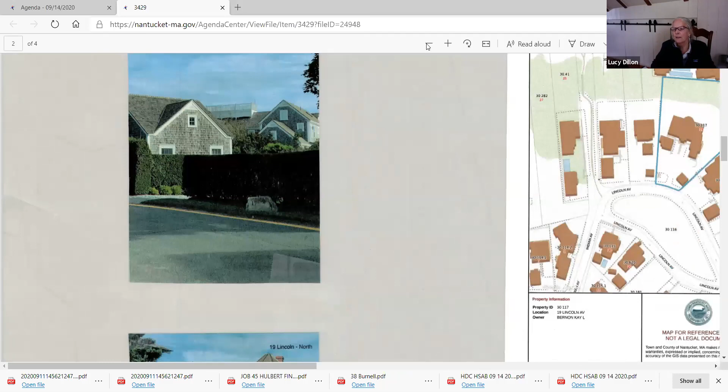You're fading - remove, fading. Sorry guys, can you still hear me? Okay. So although this is not a historic structure, the facade looks funny without the roof walk, in my opinion. Maybe it's due to the length of the ridge, but it looks a little odd. Other than that, that's my comment.

Lucy, would you like to? I agree with Holly, I think she's right. All right, Mickey? I haven't looked at it that way, but I agree too. I think it's too long a ridge to sit without anything.

Angus? I agree with Holly, that's my concern too. I actually drove by here the other day and tried to imagine what the roof would look like without the roof walk. It is a rather long ridge, and that roof walk helps to break that up. All right, chair is in agreement, it looks naked without it. Let's close this one.

And 66 Hulbert Ave. Garage move on. Why?

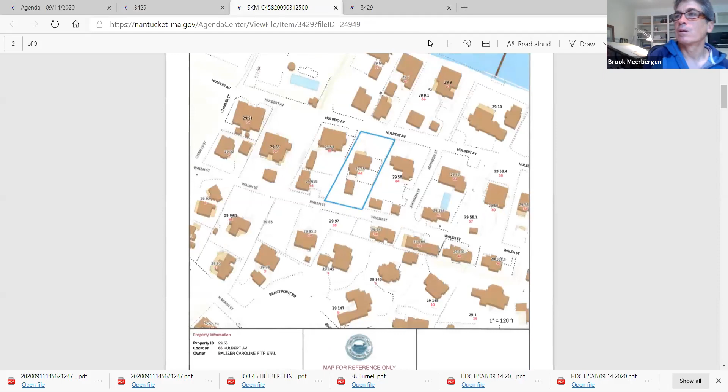Mickey, do you want to look at the house first? I can go either way, I'm fine if you want to do that. All right Lucy, do you want to look at the house first? Please - I'm scrolling through it right now and I don't see any photographs. Angus, would you like to look at the house first? Would you mind? That's fine, all right.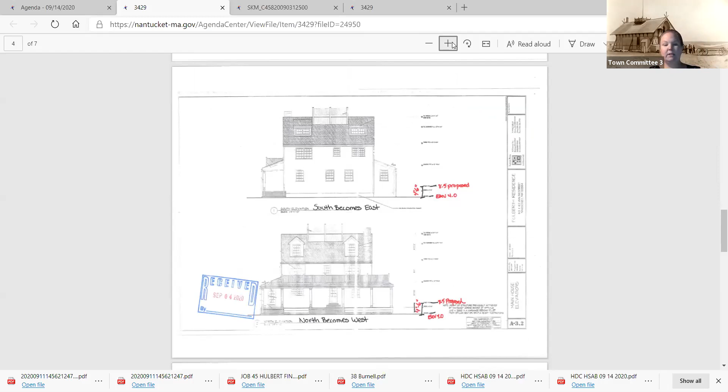This is that existing house that's on 60, that's going to move off onto 66 Hulbert. So there are no photographs - I believe these are photos, the same elevations. Yeah, these are the same elevations that they included in the application, but no photos.

Didn't realize that, all right. Lucy, would you like to say anything about this dwelling?

At first, I really don't have a problem with it, but I'd like to see photographs. And how old is it? This structure right now on 60 Walsh Street was built in 1979.

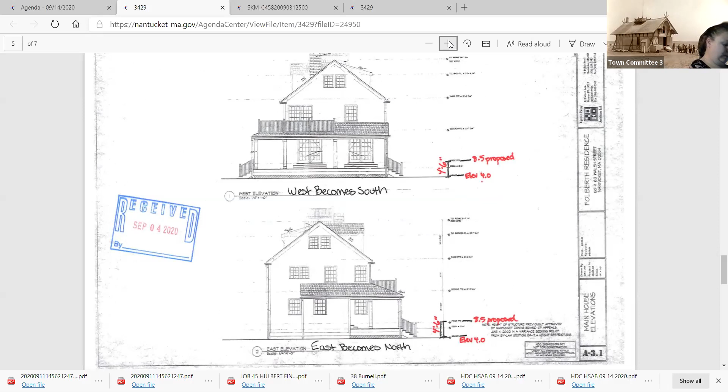Mickey? No, I'm trying to figure out which way this is going to be facing. Like the front, what's going to face Walsh Street? I would think south is facing Walsh Street. Yes, so where it says west becomes south, that's what you're going to be looking at on Walsh Street.

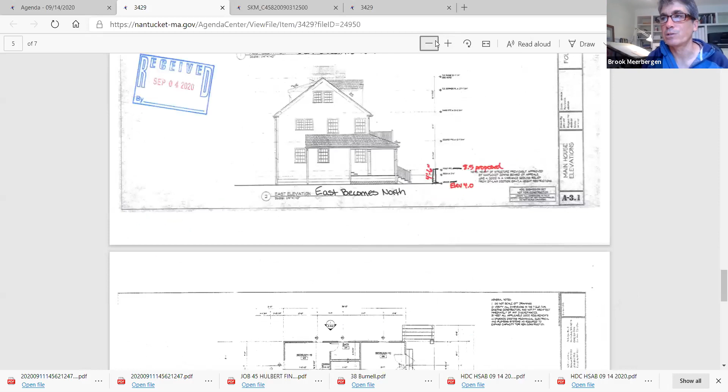So there are two French doors there, and they're the front of the building, which I assume used to be the north elevation for the two dormers. That's really the front of the house. Shouldn't that be facing Walsh Street?

Where it says north becomes west, do you feel like north should become south? I think that should face Walsh Street. Does it fit? Yeah, it does. Same concern.

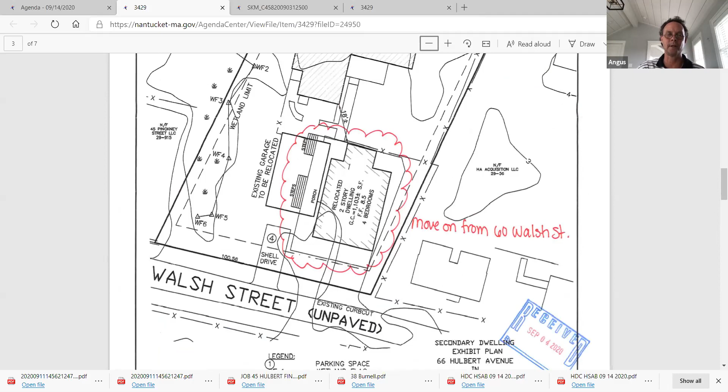Basically the way that the orientation is presented is that we'd be looking at the side of the house facing the street, with two French doors. I don't think that's appropriate.

All right, chair is in agreement. I think they need to reconsider how to orient this building so that the French doors are not on Walsh Street. And also maybe such that there is a proper front door on Walsh Street, or at least something that resembles a proper front door. I realize it's not the primary entrance, but I think looking at French doors facing south might be a little bit much for that elevation.

All right, can we ask to see this back with photographs? Yes, I would like to ask that be the case. Thank you. If for some reason we're not able to see this back, the HDC can just go ahead and process it.

I'd like to make the recommendation that the north becomes the south, in which case that side entry, I think, wants to change somehow. It's confusing to have two stairways facing the front.

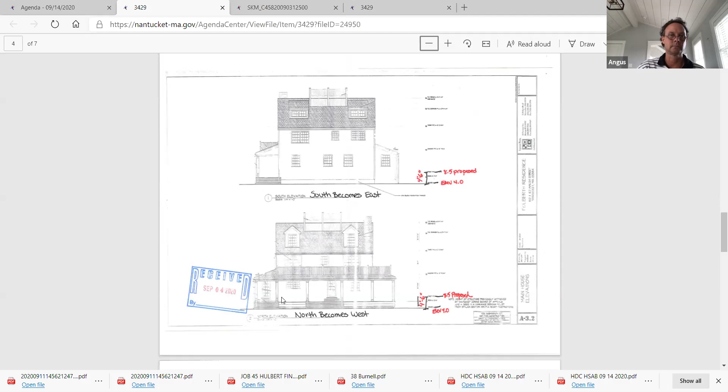If there are no further comments, I would like to close this application and pick up the garage application.

So this garage already exists and it's just being moved to the other side, is that correct? Correct. So the existing house is from the 1920s, is an A-frame.

I didn't see any age on the existing garage, but in order to accept the move-on structure, they're going to move this garage over to the other side and create a driveway over there. There are photographs of the garage. Those look like concrete blocks to me.

Are they going to change the garage doors? There was nothing indicating any changes to the garage, but that's a good point.

All right, Lucy, would you like to start? My only comment is that I'd rather see different garage doors.

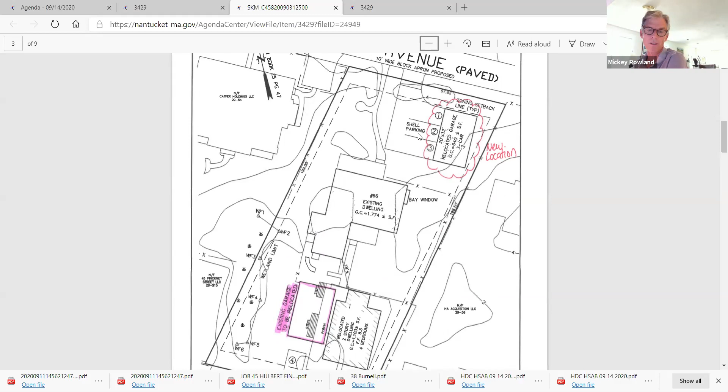So I don't really like it in front of the house. If they want a garage, they should design something more appropriate looking than using that. I'm not really in favor of it. Or leave it in the back of the property and just move it so that the other building fits near it somehow. Angus?

This part of Walsh Street running along the south side of the property feels more like an access alley rather than the main street that Hulbert is. I agree with Mickey that I don't believe that this design, even though it exists on the property, is appropriate on Hulbert Avenue this close to the road.

And there are things you can just barely tell in the photos because there aren't drawings of it, but there's a door facing Hulbert as proposed. What happens with that? Is there going to be a little walkway in there, or what do you see from Hulbert? Yeah, that elevation. I don't think it's appropriate for there.

All right, so I would like to throw out an idea, which is to rotate the garage 90 degrees so that you're actually driving past it to a parking area, or at least if you're accessing the building, you access it with the garage doors facing Walsh Street, but on that side. Then it'll look a little bit more like a boathouse or something along those lines. It might fit, and it might even allow parking spaces.

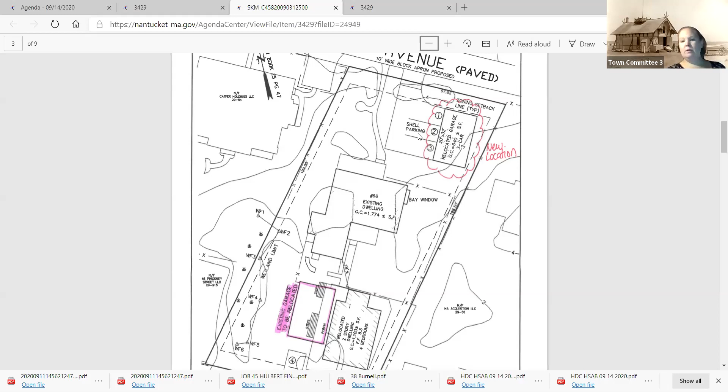I have to leave the meeting. Okay, emergency. Thank you. All right. Bye, Lucy. All right, any further comments?

All right, let's close this and move on to 11 Cliff Road. As-built fence. Dun, dun, dun.

Do we know if the gate is as-built? I believe so. Here's a citation, if it's loading up for you, given for the gate, I believe. Ah, there it is, gates. Gate and fence. So this is to cover both that were done.

Right, and there was nothing ever there, is that correct? I believe so. I have not.

And this has been a while. I believe this was a violation that was called in or what have you, so it's taken a while to get to this point. But there they are. It's not the greatest application either.

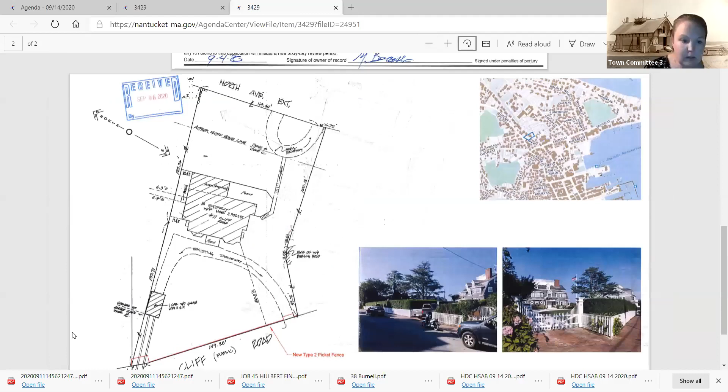And I'm assuming, red line, gate, and then in the middle is the fence. Yeah, it does appear that everything is brand new based on the Google Street View, which has it without a fence. So that's all new. So this whole thing was built without any permitting? Correct.

All right, in a highly prominent spot. It's as prominent as it gets. The nerve. Mr. Rowland, would you like to say anything?

Yeah, I was looking at the street view and you're right, there is nothing there. Or is there? There's a hedge. Yeah, it's just a hedge. I don't know, I don't mind it. What do the neighbors have on either side? There's a bunch of pickets in the neighborhood.

Yeah, you have Avellino's house that has a picket fence, you have the Hughes's old house that's a picket house, you have Horch House and I think there's a picket fence. There's picket fences all up and down that street.

There aren't just picket fences, but there are actually that scoop gate with the higher posts. There are a number of those, probably at least 3, if not more. What's missing here, I think, is a cap on the gate part to match what is on the fence.

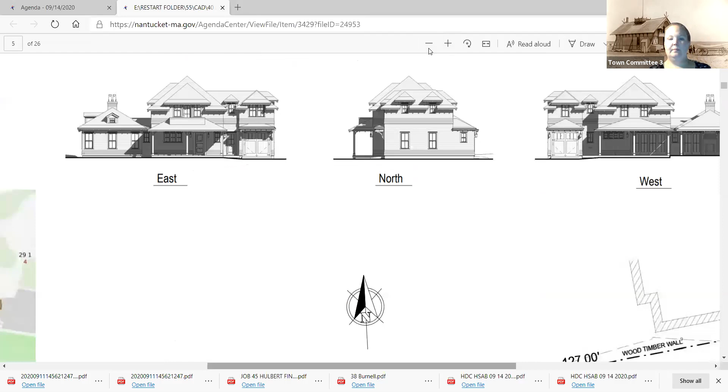These were revisions. Oh my goodness, all right, here we go. So it looks like this faces back into the lot.

Mickey, would you like to go? Yeah. So this is going to be pretty visible driving up the road, looking at the edge of the end of this building. Before there was a pergola, and that was a fairly slender, delicate structure, and now showing this, it feels like a fairly massive porch roof. It's a 7 pitch for a porch roof.

I think it's going to make the building feel much bigger as you're driving up the road.

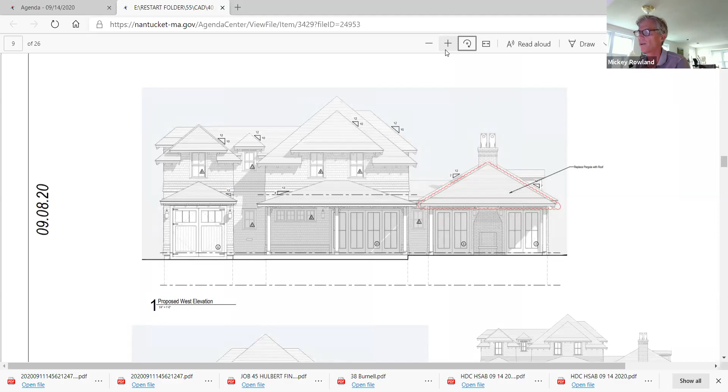I like the pergola better because it doesn't add to the width of the structure. I think if they needed a roof over it, right next to it they've got a porch roof with a 4 pitch on it, so I'm not sure why they couldn't. I know it's marrying into a 7 pitch, but I still don't see why they couldn't overlap a 4 pitch over a 7, and it'd be a much less noticeable, prominent roof pitch.

This building hasn't been built yet, right? There's still the foundation there. Yeah, I think it's just a foundation. Did we review this building before? I don't recognize it. I wish I could answer, I have no idea, I think we did. I think it's been through a few different revisions, so what you're seeing may not be what we all saw at the very beginning.

I'd like to ask Matt, when you look at the front elevation—this is an aside, nothing to do with what they're applying for—the east elevation, that hip roof is a 10 pitch, and to me that's just way too much roof. I think this would feel a lot better with a much shallower roof pitch on a hip roof all over rather than a 10 pitch. I know that's not what they're asking for, but they haven't built it yet. So to me, a 10 pitch on a hip roof is a lot of roof, and there are other hip roofs in the area that are probably a lot shallower than a 10 pitch.

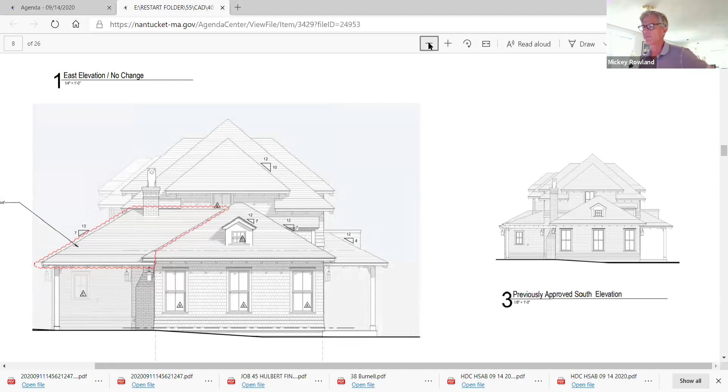Yeah, I have to agree. It's refreshing to see a really nice design as it was proposed, and it has gone through some minor revisions along the way. Where it last ended up, I thought it really looked good. I think this, as Mickey says, adds too much mass to that appendage. With just the simple hip over the structure and then the pergola, it felt very balanced and worked well. I feel like this compromises the structure and now is competing with adjacent masses. If they had to have a covered porch, Mickey has a good suggestion to go with a smaller pitch, but the mass of it just feels too much.

Chair agrees, it's massive. It could certainly be a 4 pitch. It could be pulled maybe a little bit closer so it doesn't align with the adjacent roof. I think that would be helpful, so it really is subservient to it. But overall, I agree with what's been said.

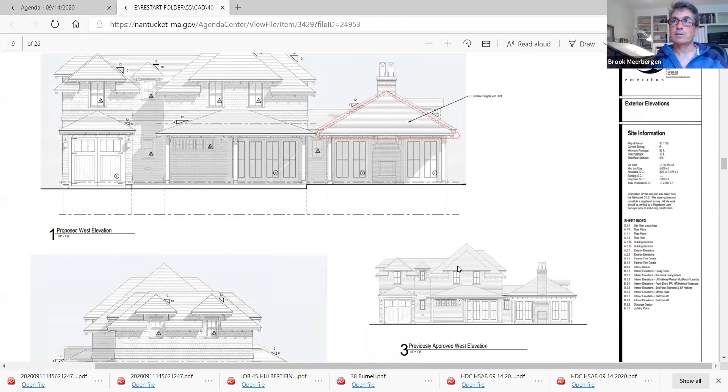If there are no further comments, I'd like to close this application.